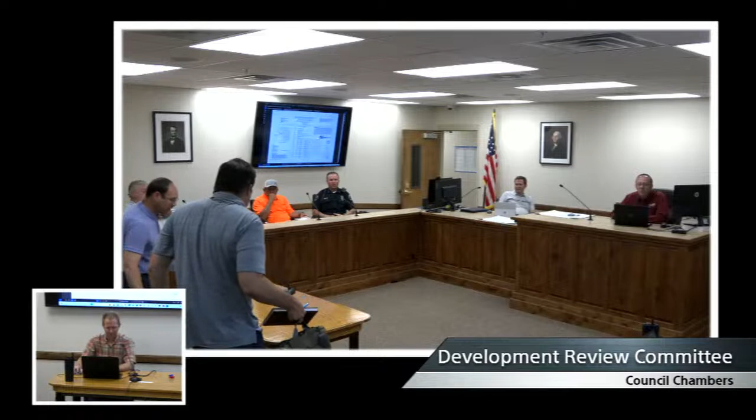First item on the agenda is the Silver Oaks final application plan. So anyone from the Silver Oaks subdivision want to come up to the table, and if you could, state your names for the record. Eric Terry, Kaysville, and AJ Del Pivo with Atlas Engineering. Awesome, thank you. Okay, so we'll get going.

This is a proposed 165 units of townhomes located on the west end of Main Street, kind of adjacent to and surrounding the Erkenbrack building on the west side of town. This is the second time the DRC has reviewed it. Apologize, let me shut my phone off for a sec. They've gone through and cleaned up their plans and addressed red line comments that were provided to them previously, and this is their submittal of those. Again, this is a final application, so the DRC is a final approval body for this application, and after this, if they're approved, they'd proceed with the construction side of the project.

So with that, we will go around the DRC with any comments or questions that the committee may have.

Starting with Randy with building: I went through, did the addressing on it. It was quite a challenge with that many, trying not to duplicate numbers, but I think we got there. So it's ready to go. Okay, sounds good. And those will be provided with the red line comments once we send it. So that's all I have.

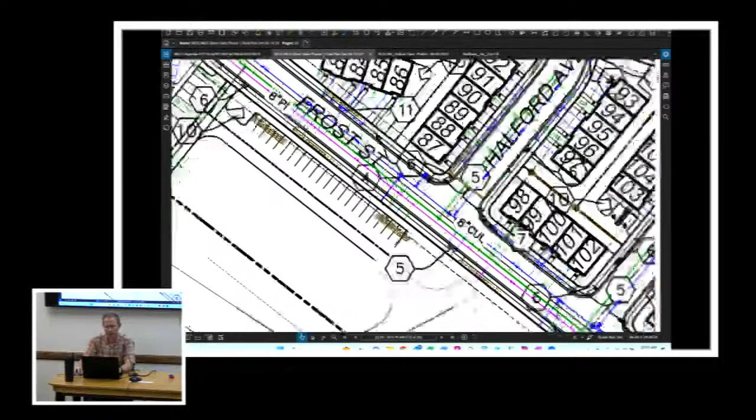I noticed they were running 8-inch PI. Is that right? I mean, shouldn't it be 6? Yeah, it's showing an 8-inch PI as it runs through there. 6 is our standard required, but you can install an 8-inch. I just noticed on the plans you had 8-inch as per Santaquin City standard. Okay, I think you could probably drop that to a 6-inch, save you a little bit of money. Okay, thanks, yeah, we'll fix that label. That's all I had.

Thank you. Chief Hurst, Police: I just had one question. Can you zoom out and go down towards 100 North? Oh, just a little bit. So, is 100 North ever going to go through? I know I asked that question before. No, it's not planned that way. Can you scroll back up?

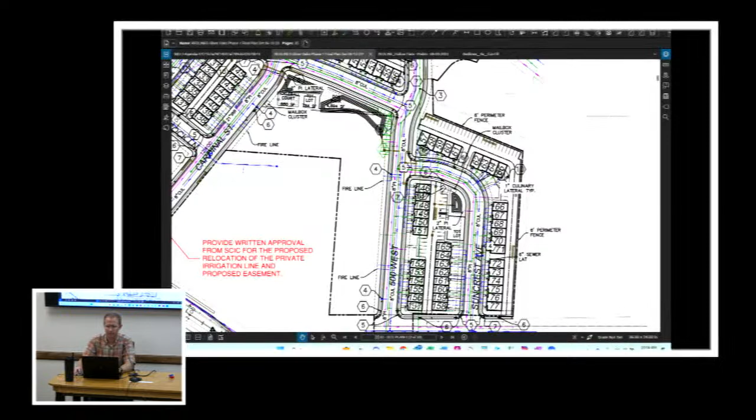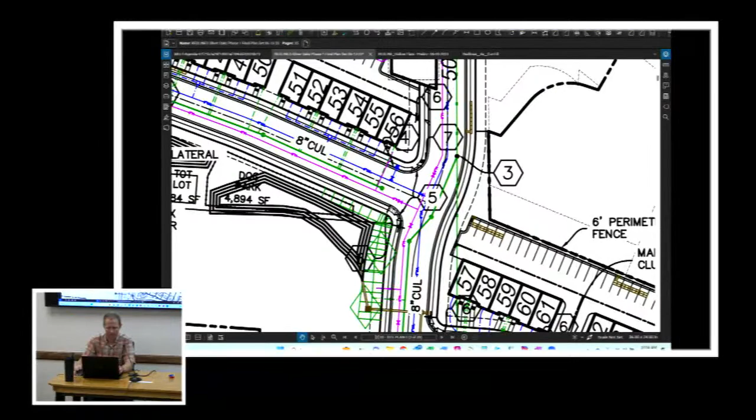I'm wondering if we can take that stop sign out and put it up here. I didn't see one right at this intersection. Shouldn't there be one right there? There is one right there. There's one shown, may not be called out, I don't have this big screen on my desk. Oh, yeah, I can really zoom in. You can add a label. You can see it clear on the plan and profile sheet. Maybe it's just not labeled on the overall sheet there. I was just wondering if we could relocate that one and put it there, move this stop sign here.

Want to leave that one there probably because there's going to be commercial to the west of that. Where that letter 5 is, that's actually an entrance to future commercial sites. So we probably still want to leave that.

That stop sign there, just add the one up above it. Needs to be there. Leave the one on 100 North and then add the other one up above. Okay, that's the only thing I have.

Oh, I see what it is. It's under the... Okay, Jason, Bond, we have those couple red lines.

I just wanted to ask again and see if you had any time to look at or consider parking next to the dog park area that you have. All the street frontage around there is going to be red curbs, so there's no parking. I mean, people can still walk to it, but I still think it'd be a good thing that you're going to have a parking lot right there for the future commercial. If it's something you could add, 5 or 6 stalls or whatever, kind of there by that number 4 call out, I think that would probably be really helpful. Again, we don't necessarily have a requirement for it, but I just think it'd be something good to consider, to give people a place to park if they want to access that dog park.

So again, that's going to be parking for the future commercial on phase 2, I think, right? Yeah, right, we looked at it. We just couldn't, being so close to final, ran out of time in terms of adding that, but we can try to prioritize that with the commercial.

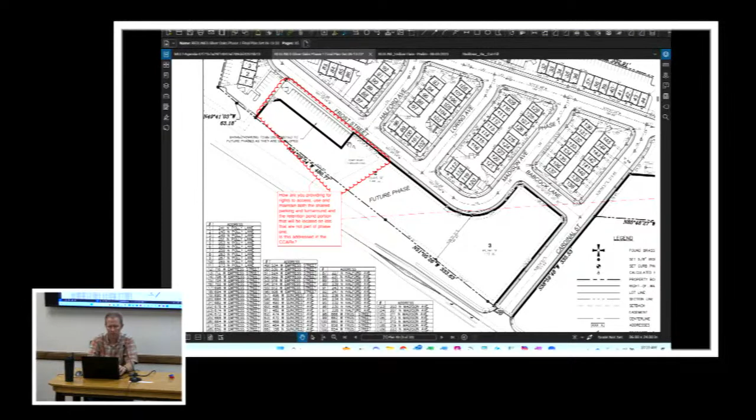Okay, anything else, Norm? That's all I have right now. Okay, and those are pretty much the major comments we'd had. We've already talked about the shared parking, and Jason talked with you about that yesterday, which is what that comment is regarding. Then I believe that was it.

Then just a question about extending the red curb. Well, that won't be red curb because that's the access to the back there. But it may be that you just extend that red curb back to that drive approach, since someone's going to try to park there. So, John, can you zoom in on that one?

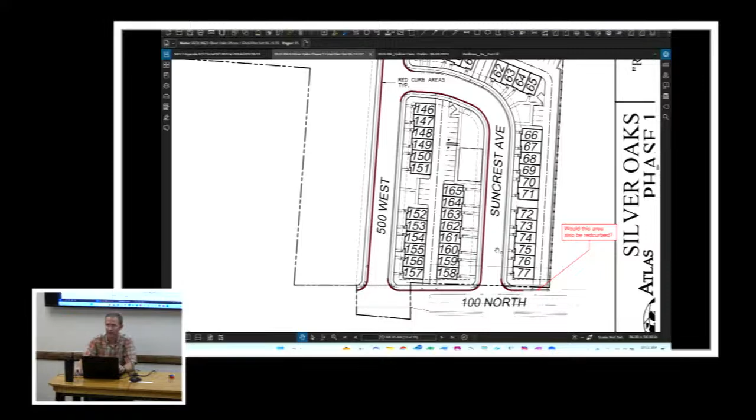I didn't have a chance to see this sheet, so we can all see what that's planned for, and make sure that what we've talked about throughout the development with police and fire on the red curbing is reflected. Can you zoom out on that? It makes it kind of harder, I don't know if you'll be able to see the red lines. Yeah, zoom into different areas. We'll have to zoom in and show.

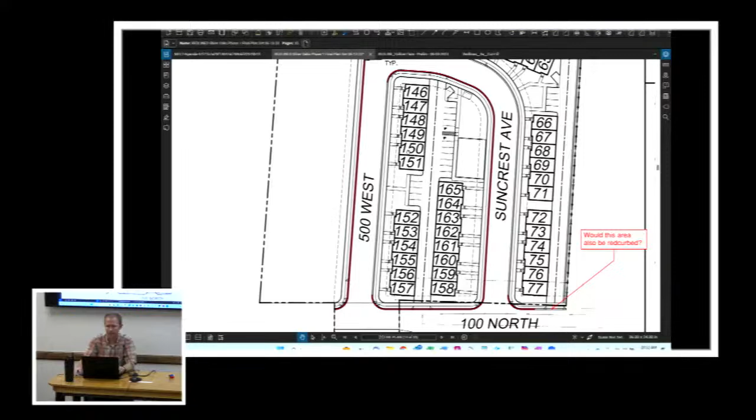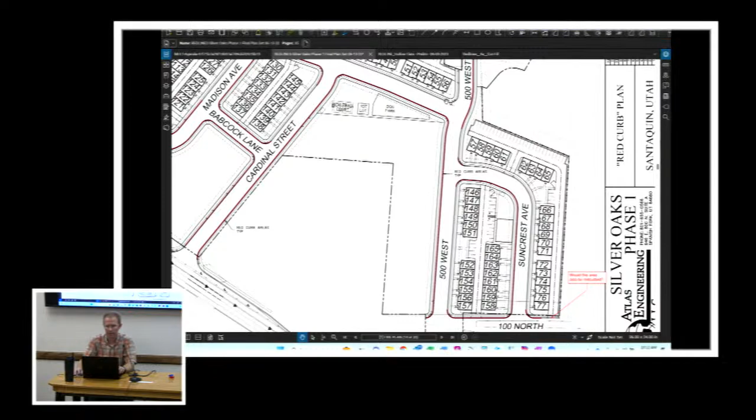So we've got a red curb at this 100 North, again extending to the drive approach, and then red curb on the south and west side, and basically on the north side of this block, everywhere there's a driveway. But the fronts of the units don't have red curb on them, that's correct. Then along the west side of 500 West, rolling up to the intersection, all the way around this block, we'll want to put a red curb on the corner there by Unit 56, around that radius. Unit 56 right here, yep, there's no red curb there. We'll want to maybe make a red line on that, John.

And then 500 West, the east side as it connects to 200 North. And then essentially, we've tried to provide as much as we can here, again coming out of an intersection. So on the north, west, and south sides of this block, same on this block here with units 130 to 145, same on 109 to 129, and similarly on lots 93 through 108, and lots 78 through 92. It's all in there. And then the north side of Empress Street, the south side of Frost Street, and the short distance on the other side of Polly Lane are not red curb.

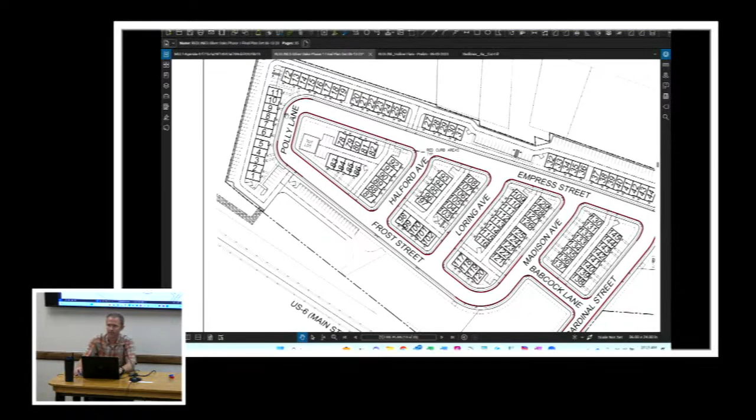So Chief Hurst, I think that pretty well covers, from my recollection, what we've talked about, making sure for Public Works that we can snow plow and have clear sight distances and all that kind of stuff. Are you guys good with that? Yeah, other than the one Jason mentioned. Okay, so there's really two things you guys still need to address on the curb returns, okay?

One more question on 500 West right there, John, or maybe AJ, you can tell us this. Is that a half plus 10 to the property line? Is that basically where we're at with that road? You're providing a half plus 10, and then we'll have to work with whoever that adjacent property owner is to make a wider road there at some point in the future?

Yeah, that's what's called out in the detail sheet too, and that's what's provided. That meets our code. There's no concern with that, but just so fire is aware of it, at half plus 10, it still provides for adequate access for secondary access.

One item I do want to point out to the DRC is that they have provided wider asphalt throughout the development. Pull the cross-section sheet up. Wider than what's required under the development agreement and the standards that were in place at the time of the development agreement, is that right?

Correct. And that was done at our request, so that we can continue to have snowplow and access and all that kind of stuff. In fact, I think that was more needed for the 20-foot clear access that we need for fire to get through there for fire apparatus. That's okay, correct.

So yeah, 34 feet of asphalt is what they provided for there, still within the 55-foot cross section, but they have provided again that 34 feet of asphalt. And at our recommendation, we took out the park strip in those areas, right? Yep, we narrowed the park strip through there.

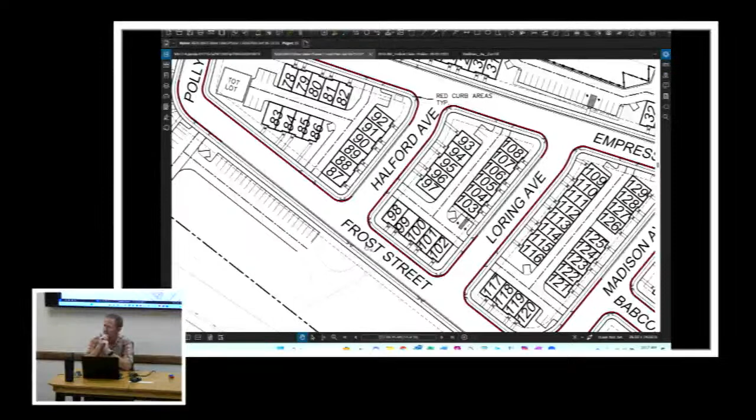But my point is there's going to be a lot of parking over there that's not on the street, and it's shared, so people are going to naturally park there, and we may as well have them park on the same side of the street that they're going to want to access the buildings. They're not going to be able to park there in the wintertime anyways, because our code refrains from people doing that so we can snowplow.

One thing that didn't make sense to me as we're going through this is we're getting everybody to park on the opposite side of the street of units they're going to access. I don't see them parking that way again. This is coming from the plan we had before, so we'd have to revisit it, because then you'd have 34 feet of asphalt, which you don't need. With 8 or 9 foot parking, you'd have 25 or 26 feet of asphalt left over. I get that parking on both sides makes the street unnecessarily narrow, but if we're picking one side, I'd pick the side people are going to access more. No one's going to park on the south side of Frost Street to access those businesses.

Sure they are, because they're going to use that shared parking there too. No, but human habits are that they're going to want to park closer to the units. The parking stalls are going to line that entire Frost Street, and they're going to park in those stalls, not on the street.

Let's take this offline and visit with Public Works and Public Safety on that. We've already had this discussion a number of times. If we're going to change it that much, we need to get back with Chief Hurst, Chief Lind, and Jason to find out what we're doing there. We'll give you feedback on whether we need to go red curb on that, and get together offline.

Yeah, that's neat. The good news is it's easy to stripe one side or the other, right? Right, and we can make that change right up until—and even change it later. It's an easy change. Before we paint the curb red, let's figure out the best place to red curb it.

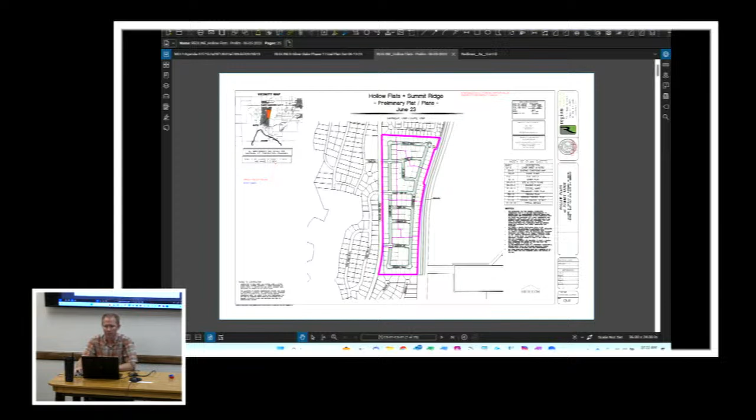Okay, so this is a preliminary subdivision located on the west side of the railroad tracks and on the east side of Summit Ridge Parkway. There are existing homes to the north and existing homes to the south up in Summit Ridge. It's approximately 50 acres of land that was recently annexed into the city, with a development agreement and annexation agreement in place for this. If you recall from the last time the DRC reviewed this application, it was tabled to address red lines, especially on getting the appropriate easements to extend the sewer line north along the Union Pacific Railroad.

They have provided the deeds and the quit claims associated with that, and updated design for the DRC to review at this point in time too.

So again, this is a preliminary application. The DRC's role would be to provide a recommendation to the Planning Commission for their review. So with that, we'll go around the DRC and see if there's any thoughts or questions.

Starting with Randy: I've gone through and done the addressing on this parcel as well, so it should be in the file there. Provide those red line comments with this. Chris with Fire has nothing.

Okay, Jason Cow with Public Works. Yeah, down on the north end there's a culinary valve that's mid-block. I wonder if we could just move that up to the northwest corner, just to make it like all the other valving we have.

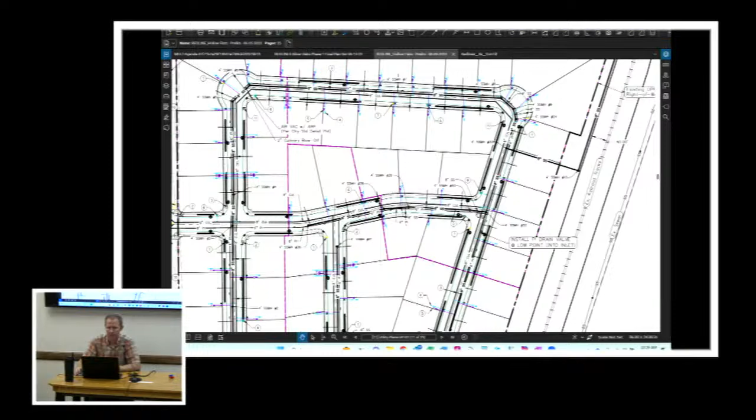And then some of the PI valves, I don't know if it was this sheet, but it looks like the labeling was covering them up. I think they're all there, I just think the labeling was covering up some of the PI valves - they're kind of tucked in there with the symbol.

But other than that, make sure when you do connect to this that you connect to the right zone. We do have a couple different pressure zones in this area, out in Summit Ridge Parkway.

If I remember right, they had to go to the north to pick up either the PI or the culinary to get below the PRV. That's correct, and they are showing that - that very south one will be, you'll have to make sure you get on the right zone there.

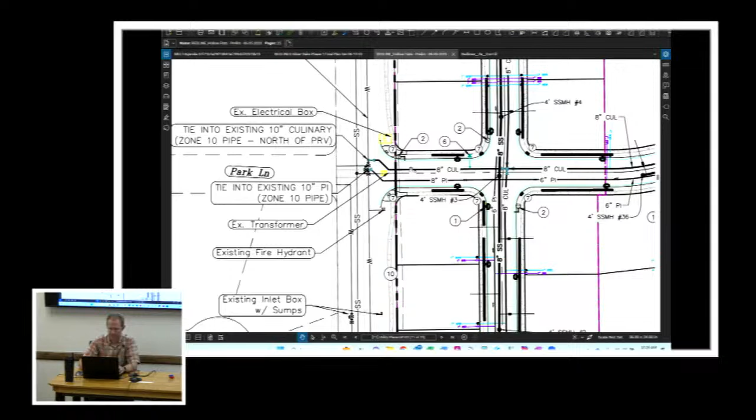So Sean, if you'll just make sure that you add a construction note there that says coordinate with the city for proper connectivity, that way we can make sure in the field that we get connected to the right one. It'd be bad to cross pressure zones - yeah, they don't want to deal with that. Other than that, that's all I have.

Okay, sounds good. Chief Hurst? I don't have anything. Okay.

Jason Bond, we'll just talk with the red lines that you have. A lot of it's engineering. Okay, Nora, do you have anything else? I don't, other than just whatever your engineering comments are. Yep, and we'll jump in. We discussed some yesterday, let's go through those. Yep, we'll jump right into it essentially.

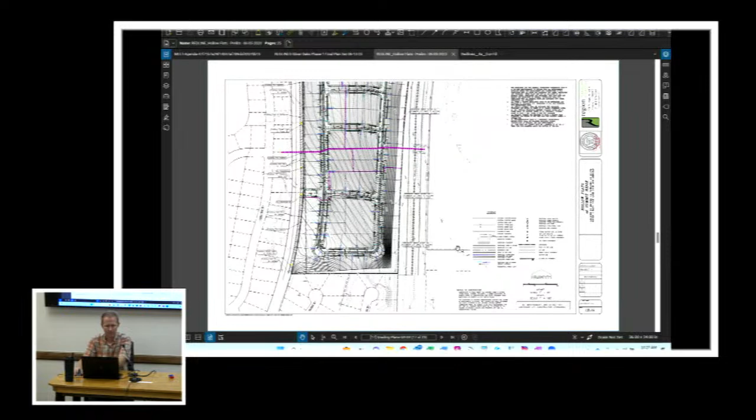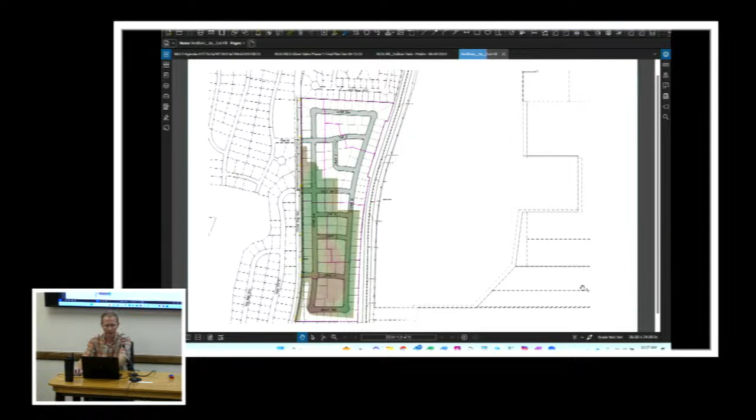For the most part on the plan set for the preliminary, there wasn't any major comments. What we do roll into is the grading comments, and essentially the big question is how this overall grading is going to be done to minimize any issues that may arise from fill areas, how the operation is going to be done, whether it be access, haul routes, etc., and appropriate testing to be done. That's kind of some of the main questions associated with the overall mass grading that's going to be needed for the site.

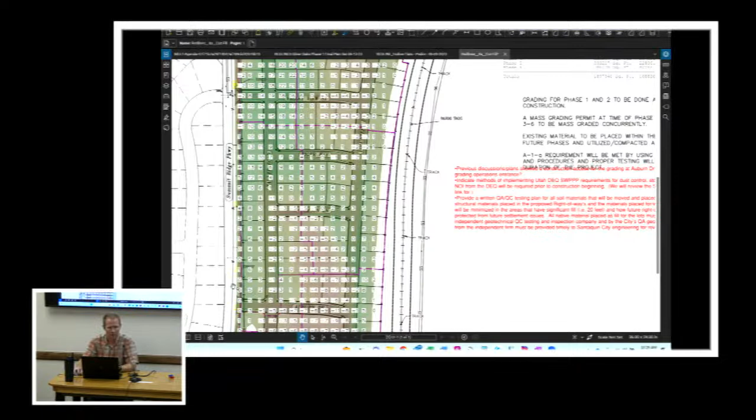So again, previously we discussed Auburn Drive as being the overall construction access, verifying that that's still the case, and what's going to be done to help protect that shoulder and curb there until that road is finished up. I believe it's Auburn Drive. Yeah.

So we did, go ahead John. We did propose Auburn Drive to be a thicker asphalt section and a thicker structural base. I think that's on the detail. And then we put together a conditional use site plan showing haul route and access point, along with the IGES testing summary, how they're going to go about doing that.

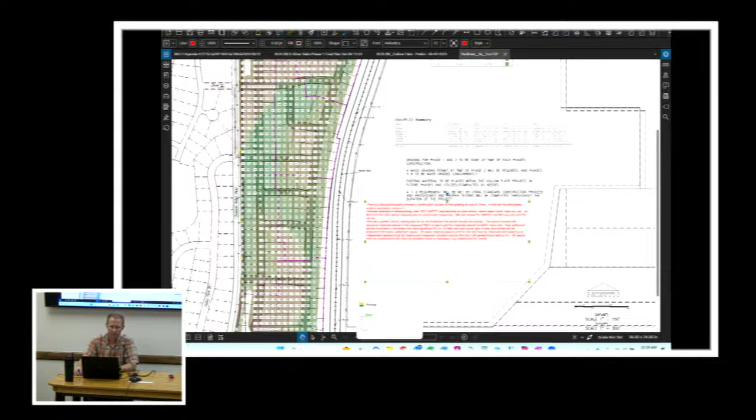Do we have that, John? It sounds like we don't have that. You do, we submitted it. It was in that email from the 16th. So the information that I had, the IGES, are you talking about the geotech report that was done with that? No, but they wrote a summary, a supplemental letter just saying this is how we plan on addressing the site clearing, grubbing, subgrade prep, testing standards, testing frequencies, testing procedures, this is how we plan on approaching this project from a compaction testing standpoint.

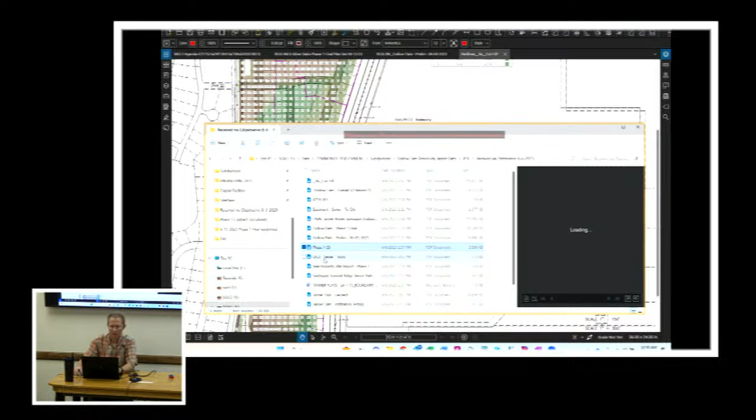Which document was that titled? So this was, because the overall storm drain report—on the title, let me see. That was, then we got the Hansen, Allen & Luce study, phase 1 of the Hollow Flats, the plan set for phase 1, same thing with, there's the geotech associated with it that was done. The two quitclaim deeds and title reports associated with it. We have the transportation plan.

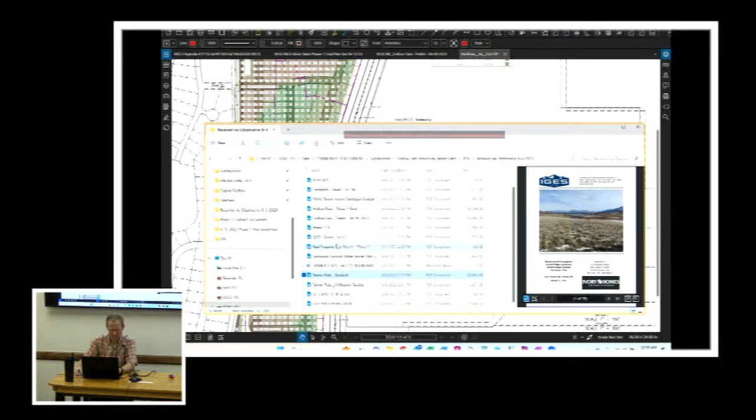It's called the conditional use site plan full, and so I included it in there. I mean, as requested, we pretty much have all the info for the mass grading permit, but I didn't know if you wanted us to do a CUP application, which I didn't think you did, so I just included all that data with everything else, with the preliminary, with the easements, with cut fill, with the final landscape plans. It's similar to what we did on Summit Ridge with all the documents, the dust nuisance, access, noise, lighting, odors, kind of, it's pretty much a conditional use permit full set without applying for the conditional use permit.

And I can send you this if for any reason it's not there, but it's basically a 3-page letter from IGES. It's a supplement with an introduction, test standards, test frequencies, testing procedures with tables. Okay, yeah, at this point, closure signed by Justin. Yep, so I haven't seen that document. So John, I sent a link, I don't know if you have a second. You want to just click that link I threw in the chat. And you can scroll, so we're not going to review it while we're here. We just need to make sure we've got the information, and we can proceed accordingly.

John, let's just do the red lines that we've got. Yes, and it appears that there's still some things we either didn't download from the link or weren't on the link, or something of that nature. But we'll address the red lines we've got and move through that way so we can get going on it. Yep, so again, those are kind of the main things, and really, because I know any mass grading or anything that's done anywhere in Santaquin needs to make sure we're addressing all those items we've discussed.

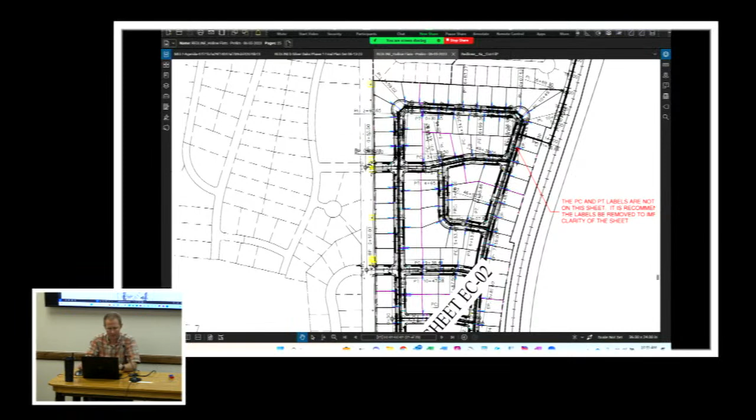Oh, just this comment to help clean that up, Sean - you got a lot of PTs and PCs and everything in there, so that's mostly just to help with legibility. Yeah, gotcha.

So John, from the engineering perspective, help us understand what you need or how you feel this should move forward - if there's more information you need, or if you need to review it, or if it can happen with a recommendation moving forward. So, as we mentioned, there's a couple comments that Public Works had that could be easily cleaned up.

a recommendation to get moving forward to Planning Commission. I'd like to review it and everything prior to Planning Commission, and all the comments being addressed before then - before it would be scheduled to be on there.

John, I would make a motion that we recommend this moving forward to Planning Commission with those few items still needed from the grading side of things to get submitted and be reviewed before it's on an agenda for Planning Commission.

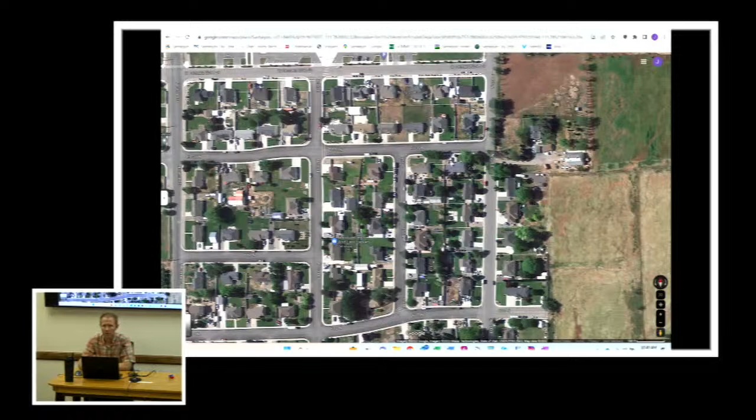Some history on this area: we did a traffic control request similar to this last August. We've done a couple in the past few years. Most recent was, I think, last August, before the school year started.

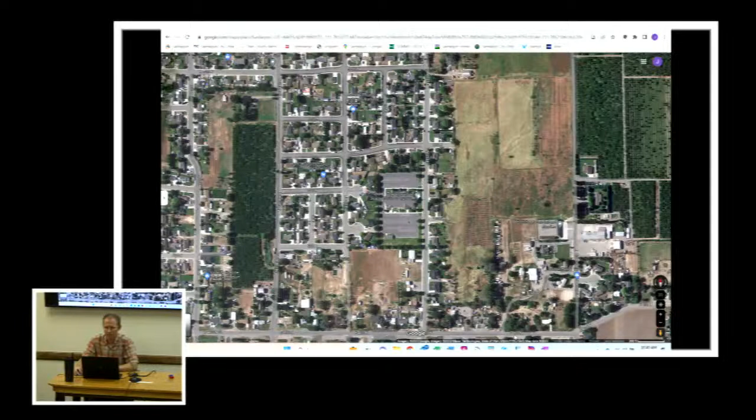That one included more of a traffic control here at 610, getting a safe route for kids to make it from south of 400 North and east of 200 East, to give them a safe path to school up there. And when we did that, we painted crossing bars on 400 North to get to the west side of 200 East.

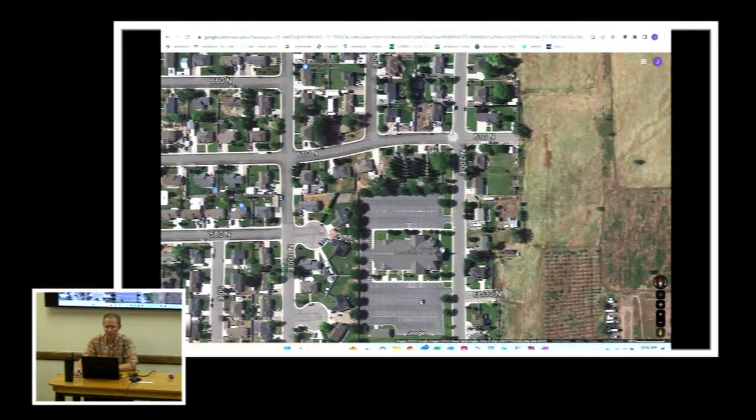You can see them on this aerial image. At 610 North we did crossings, and the intention was to have kids funnel over to move west at that point to get to 100 East, because 100 East is the main connection and crossing to the front of Apple Valley Elementary. So at that point in time, that was the discussion we'd had, and it went through this way last school year.

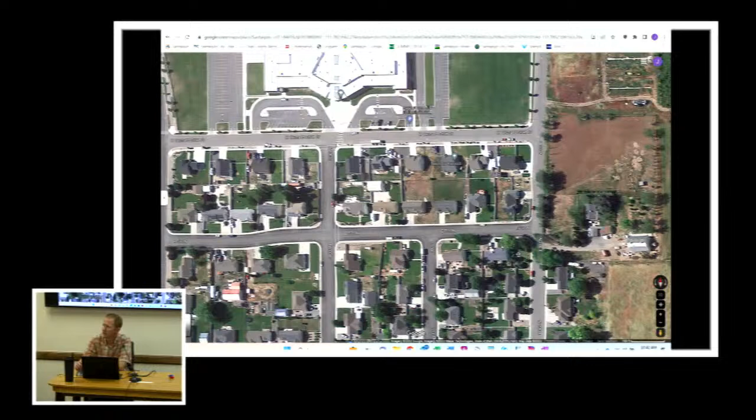But this request is to add a crossing here at 770 and 730, and then relocate those stop signs. To be clear, the reason this is on here is because we've not specifically addressed 770 or 730 as stop sign requests. All the other stuff has already been addressed, so the crosswalks are or will be painted for school according to the desires of the school district and their recommendation to funnel everybody to the front of the school on 100 East. So we're not considering those today, just the proposed change at 730 and 200 East.

Correct. I apologize, I did have the request pulled up, but I had to close my window here, so I'll bring that up real quick to show you.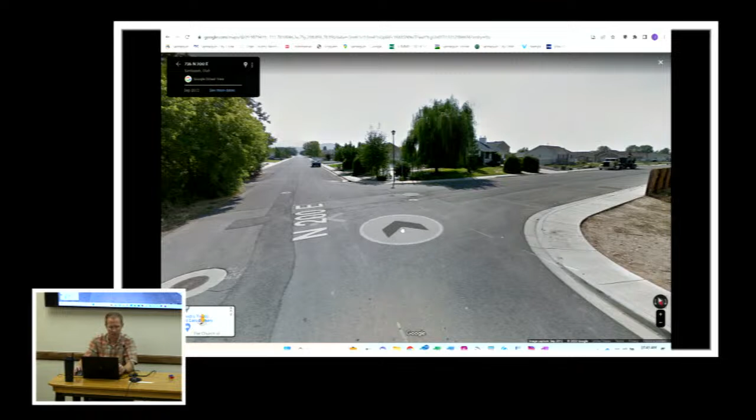While that's loading, just so everyone's aware, currently the existing traffic control here at 730 and 200 East: there's a stop sign. I'll pull the street view up to show you. There's a stop sign for southbound traffic on 200 East, and a stop sign for eastbound traffic on 730 North. But there's no stop sign for northbound. Let me pull up to here as that's finishing loading.

Another crosswalk. But again, we've already addressed the crosswalk issues all along this corridor with what the desires are of the school district. So let's go around the DRC with any comments, questions, or thoughts.

Randy, Chris, Jason, Rod? This just seems to be something that keeps coming back time and time again. Is the biggest concern that we're trying to control speeding? That is a point that was discussed in the text provided by Jesse Stickney, that they do feel adding a stop sign could slow down traffic, whereas, as we've mentioned in previous discussions and applications, stop signs are not speed controlling.

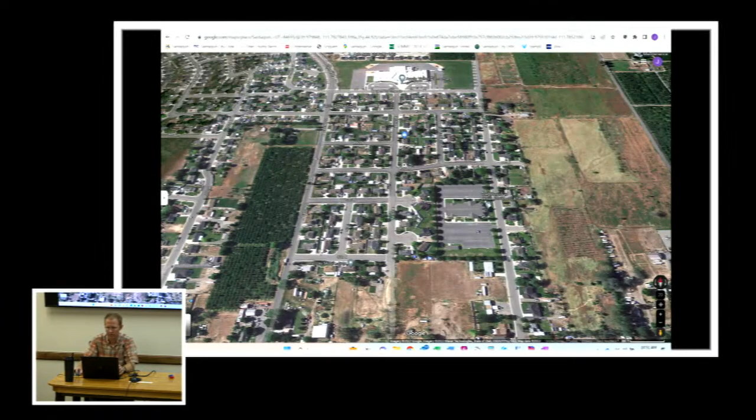Really the intention there—and I know Chief Hurst met with the school district recently, a couple weeks ago—maybe if you can turn your map around, go two-dimensional, up towards the entrance of the school, and zoom in closer to the school.

There you go. I think the intention is to funnel up to that front door, because if they cross and want to get up to the corner of 200 East and 770 North, they're going to have to cross four driveways, which will have parents dropping kids off and buses. So it's important to understand the layout there.

And yes, naturally some kids are not going to remember, or they're not going to follow that, but that's, I think, the safest way to deal with the situation.

Now, if there's speeding concerns—I've thought about this—stop signs don't control speeding, MUTCD says that. It might have them temporarily stop, but then they just speed right back up, and in some ways people overcompensate and speed faster just to get through stop signs on a given route quicker.

So if there's speeding concerns, there's a different way to address that, and a call can be made to our police department, and it's a corridor they can take note of and watch a little bit closer. So yeah, I agree with what's been said.

Norm, do you have anything else? Okay, so this application—DRC is the approval body for it, the action body, I should say. So if there are no additional comments, I'd look for a motion.

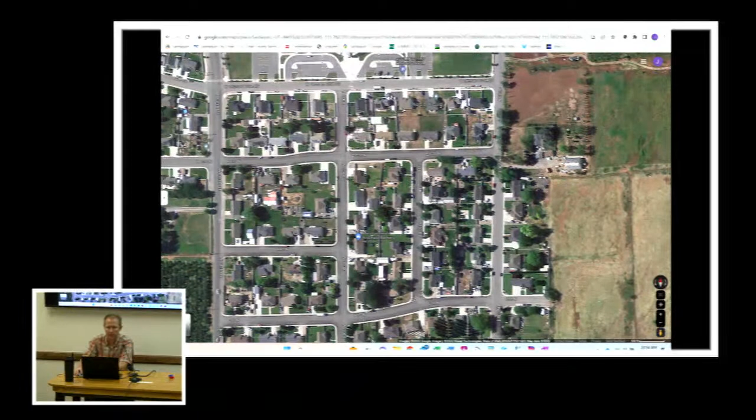So there will be a crosswalk here on 400 North, a northbound crosswalk, and then an east-west crossing to get to 100 East, and a straight shot down through Apple Valley Elementary, and Center Street and 770—there will be two crossings there.